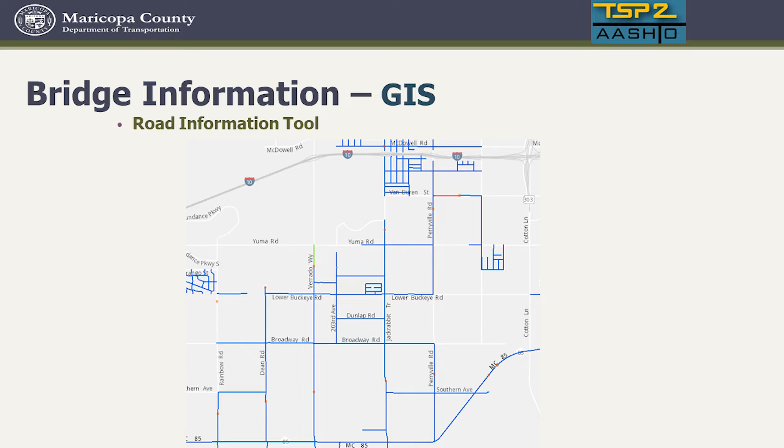This shows us our roads, which happen to be the blue roads. And then where you see the green roads and the red roads, that's where we own half the road. A city may own the other half of the road. We own the north side and they own the south side. The roads that are white are probably owned by the cities. And the gray roads are usually owned by the state. So just keeping track of who owns what and who's responsible for what is a huge effort and a challenge for us. So anytime we get a problem on a bridge or something else, first of all, we've got to figure out who owns it.

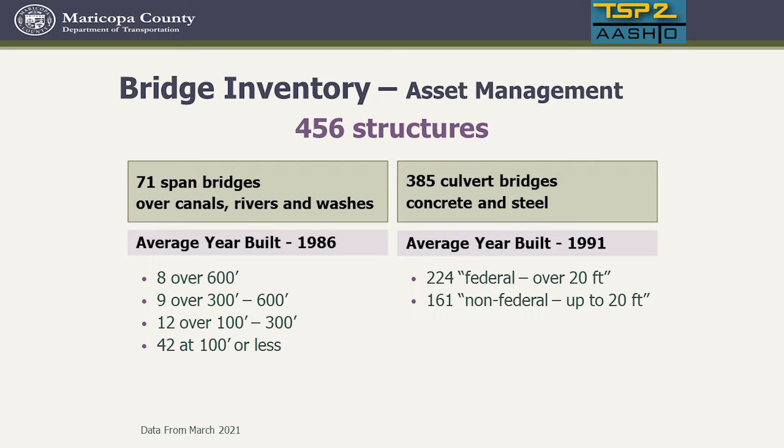In county inventory, we have 456 structures that we inspect and look at. We have 71 span bridges that are over canals, rivers, and washes. We have 17 bridges that are over 300 foot in length. And then the remainder of our span bridges are 12 plus 42, so 54 that are less than 300 foot in length. Then we have a lot of culverts. We have 224 culverts that meet the federal definition. They carry the 20-foot wheel path. And then we inspect 161 of the smaller box culvert structures.

Basically, in our county, we have a unique situation in that it very rarely ever freezes here. We just don't get snow. We may get a snowstorm once every 2 years or something. We get an inch and it's melted 30 minutes later. But overall, our bridges don't have the environment they have in other parts of the country.

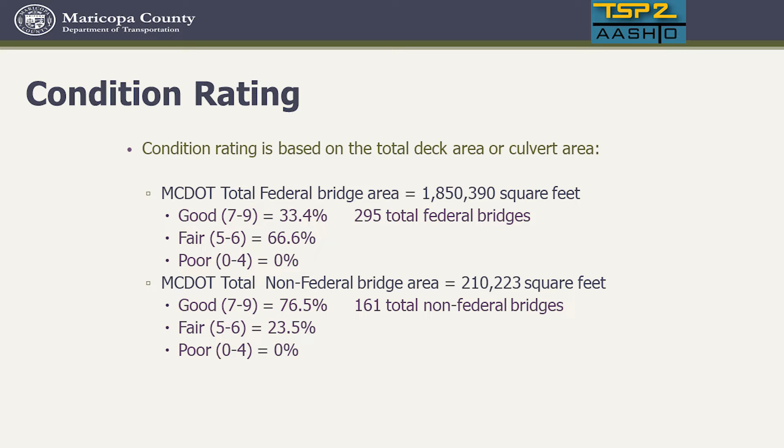But even with that said, our good condition bridges are basically 33% of our inventory, 2/3 of them are in fair condition, and we have 0% in poor condition. So we have that big group that are in fair condition. Those are the ideal candidates to do bridge preservation on. Some of the things we deal with in bridge preservation: we have a lot of bridge deck cracking over time and delamination of the bridge decks.

Leaky expansion joints are a problem. We have a lot of voided slab units, side-by-side units that were just topped with asphalt, and those become problematic. We have erosion and scour issues. When it does rain, it can really rain hard - we get quite a few inches in just a few hours sometimes. Our concrete deteriorates, especially where we have wet and dry zones. And then we have silting of culverts, and vegetation can be a problem.

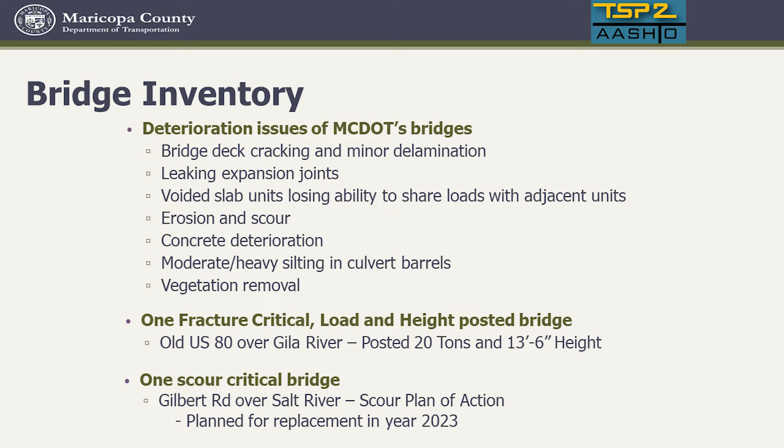We do have one fracture critical bridge, which happens to be a load posted bridge. It was built in, I think, 1928, and we'll see a little bit more on that one here in a bit. It was damaged.

And then we have one scour critical bridge, and that bridge is going to be replaced here in a couple of years, so we'll no longer have a scour critical bridge once we get that bridge replaced.

In Greater Phoenix, we have 24 cities and towns in the area, so trying to figure out who owns what and who's responsible for what can be quite a challenge.

Our average temperature in the summer, according to a Google search, was 93 degrees - that's the average between day and night. So it gets very warm here in the summer. We basically don't salt any roadways, and we have very few days of freezing temperatures.

We have a huge population boom in this county. Last year, we had about 83,000 people move into the county, and if you look back over the last 3 to 4 years, 80,000 people every year is very common for people to move into Maricopa County and call it their home.

We have a lot of bridges constructed over water canals. These water canals are used for irrigation. These canal companies usually claim that they were there before the bridges were there, so whenever we work on the bridges, they claim they always have prior rights. So not only do we have to fix the bridges, we usually have to fix the canals in order for them to let us work on our bridges.

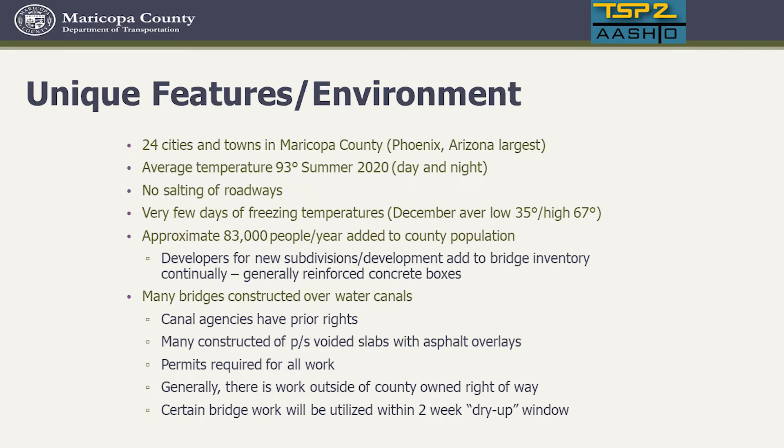Generally we only have a 2-week dry up window. Usually around Thanksgiving, these canals will dry up so they can do maintenance work on them. Anytime we have bridge work on those canals, that's when they want that work done. Also, Ryan will get into it when he does the inspection work - that's the 2 weeks he can get under the bridge to do the bridge inspection. Basically, nobody goes on vacation around Thanksgiving usually, because that's a busy time for us.

We do our own NBI bridge inspections for the most part. We have had ADOT do a few of our fracture critical or underwater inspections, and some of the canal bridges where getting permits was very, very difficult for us. Since they're doing the canal bridges for many of the other cities and some of the other counties on those canals, we let them do some of the canal bridges.

For bridge replacement, rehabilitation, maintenance, and things, we basically have a 5-year plan that we use. We enter our information into our GIS asset management system and also into the BRM system that ADOT provides a lot of the services for. Prior to 2020, we actually had some other systems that did some of our GIS work, and we've kind of gone to a new system here recently. But anyway, technology really helps us out.

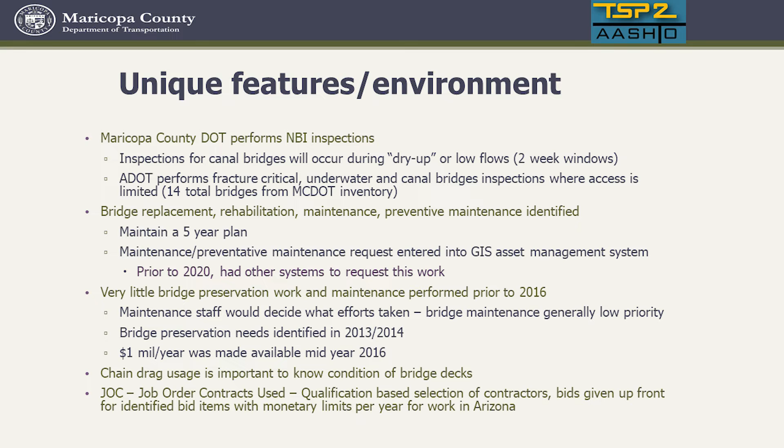We identified a lot of bridge preservation needs in 2013 and 14, and then finally in 2016 our management gave us $1 million a year to go toward bridge preservation.

We do a lot of our work with job order contracts. Arizona state law allows us to hire contractors on a qualification-based basis, so we select our job order contractors and we're able to use them generally for the next 5 years. But we negotiate each task as we go.

Cracking is one of the things I use to really sell this. This was probably the biggest problem we had in the county—these bridge decks were all cracked up. I don't know if you can see the cracking very well, but sometimes there's a lot of map cracking.

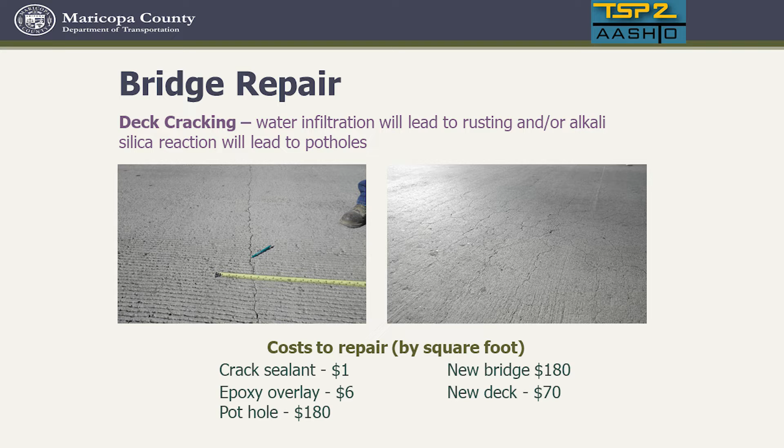If you wait till the deck's bad enough and the girders go, you might need a new bridge, which would be maybe $180 a square foot for us. If you just wait and need a new deck, that might be $70. However, I can do some sealants or epoxy treatments and it's a lot less, and I can preserve these bridge decks for many decades.

Potholes are very expensive, believe it or not. Everybody says, well, it's just a pothole. I know in New Mexico one time they showed me a bridge that was 40% pothole, and then they tell me they don't have money to fix it.

And I go, you already spent more money than it would have cost if you'd given me the money to replace your bridge deck. So don't tell me you don't have money, because you've already spent that money, and you're going to continue to spend it until you reach a point where you just have to replace that bridge deck or whatever it is.

With this, I'll turn it over to Ryan and let him tell you about some of the things he's been working on. As Jimmy said, I'm the bridge inspector for Maricopa County owned assets, and because of doing the inspections, I can go and see the issues and maintenance items that we may need to do.

So I get with Jimmy, and like he was talking about, we try to determine a 5-year plan and try to take care of our bridge maintenance.

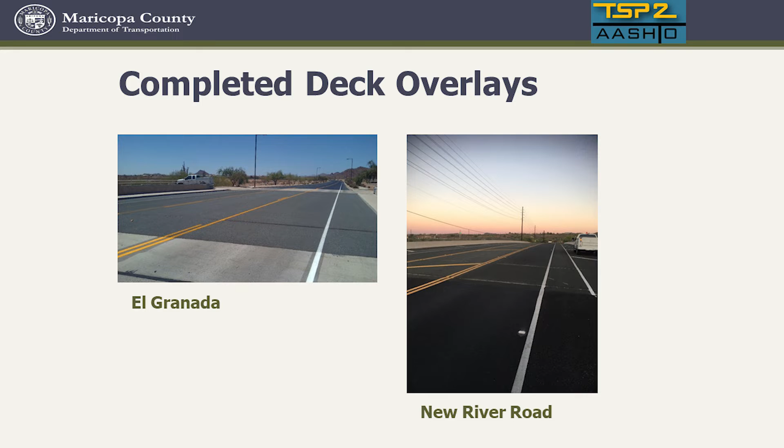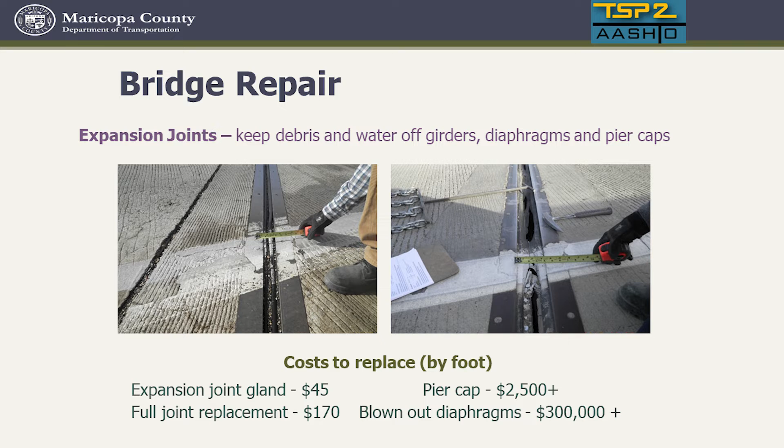A couple of joints where they've been torn or where they're not doing their job anymore. As you can see here, it's a lot cheaper to just replace a joint than to go and replace a pier cap or a diaphragm.

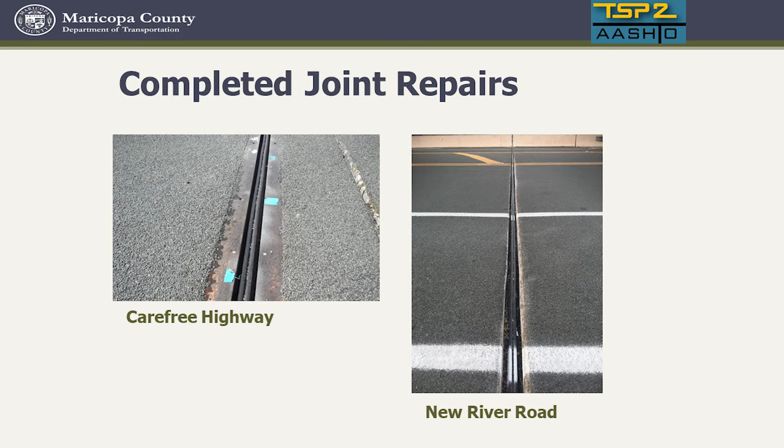This next picture right here shows a couple of the joints that we've actually replaced, and now they're nice and new and they're stopping the leaking from happening. We're able to help take care of that as well.

The maintenance work that we've done to date—so like Jimmy said, we got the funding back in 2016, and then we started coming up with our lists and items of bridges.

Usually when we do that, we kind of start with some of the worst case bridges, but we've gotten to the point where we do it area specific so that we can keep the mobilization costs down on JOC contracts, because that actually takes up quite a bit of money to have them move around the county, since we're kind of outside the major cities and stuff.

So we've got 6 more anticipated coming up this fiscal year. They're supposed to be starting those, I think, January and February coming up here.

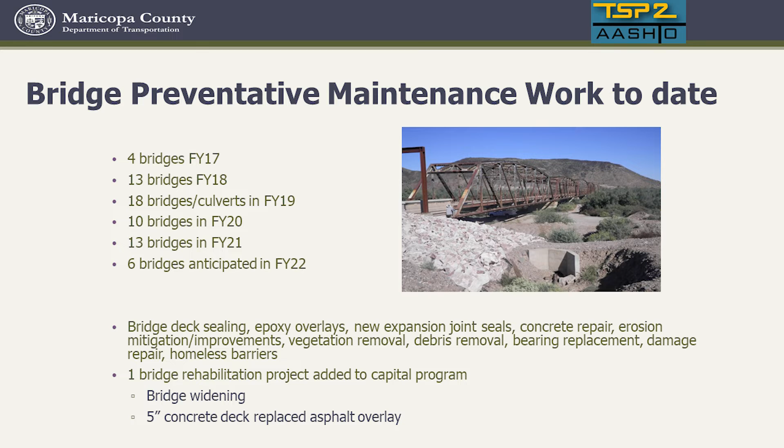In the past, the kind of maintenance we've done includes bridge deck sealings, epoxy overlays, replacing expansion joints, concrete repair—which usually consists of repairing the deck for delamination or potholes—erosion mitigation, vegetation removal, debris removal, and bearing replacement.

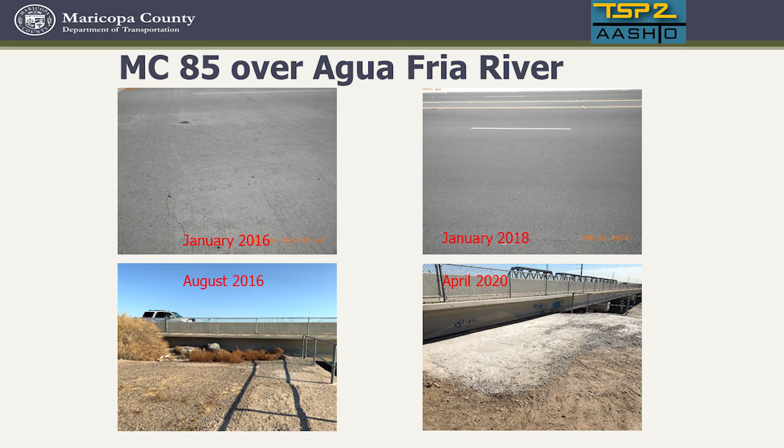This one's kind of a new one we tried this last year: we created an access gate, I guess you could call it, to keep homeless people from crawling in between two girders and making a home in there, because it actually makes a nice little home for them.

In the past, we've also done a bridge widening, I think this was a couple years ago, where we extended it a couple of units. It was a voided slab bridge, and we extended a couple of units and then added a concrete deck on top.

Here's a picture of one of the bridges. This one we did an epoxy overlay, so you can see on the top where we've got the cracking that's going along the deck, and then the new overlay on top.

On the bottom, we had some vegetation and erosion issues going on, so at each corner of this bridge we had them remove the vegetation and do a slope so the water could slope away from the bridge girders right there.

Also, in this particular one, homeless people were actually digging underneath that girder, making a home there, so that was also to help prevent the homeless from crawling underneath that girder.

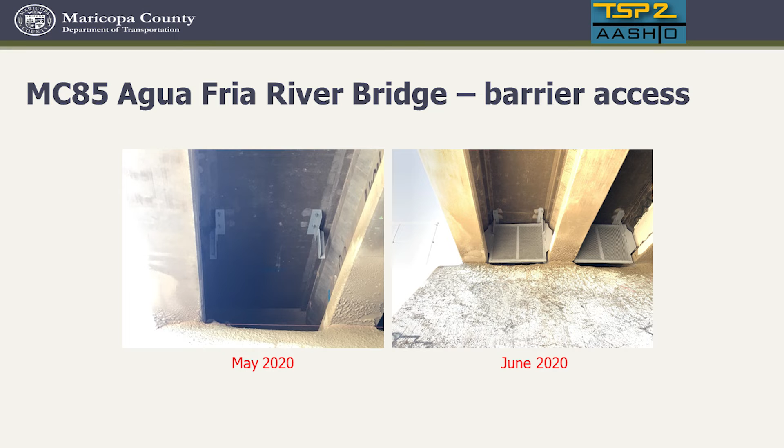This is the same bridge as the previous one. We actually had to put up these barrier access gates on the bridge, to try to prevent that, because when I'm out there doing inspections I would hate to have a surprise of someone having passed away up there. So we're trying to prevent something like that from happening. Damage to bridges as well.

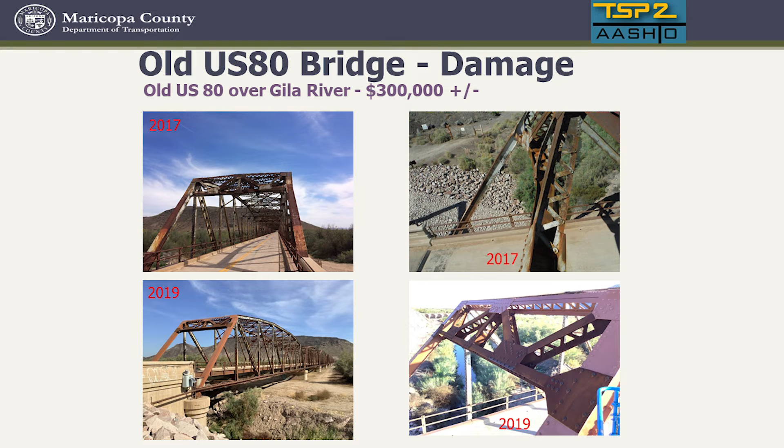This particular bridge, a Fracture Critical Bridge, is one of our older structures here in the county. I remember doing the inspection in October, and then we got a phone call, I think in February, saying, hey, what are you guys going to do about your bridge? And we're like, what are you talking about? We came out and saw that our portal trusses had been bent on this bridge because an oversized vehicle apparently drove through there.

So we got the funding together and got plans together, and we rehabbed this bridge, straightened the trusses, and put in new damaged members. They were new members, but we tried to make them look as similar as we could to the old existing truss.

On this bridge, on the top, we have the vegetation removal that we did. Me and Jimmy decided there was a potential fire hazard on this bridge, so we got a job together and had the vegetation removed. We've asked our maintenance group now to go out there once a year to keep that clear so we don't have any potential fire hazards in the future.

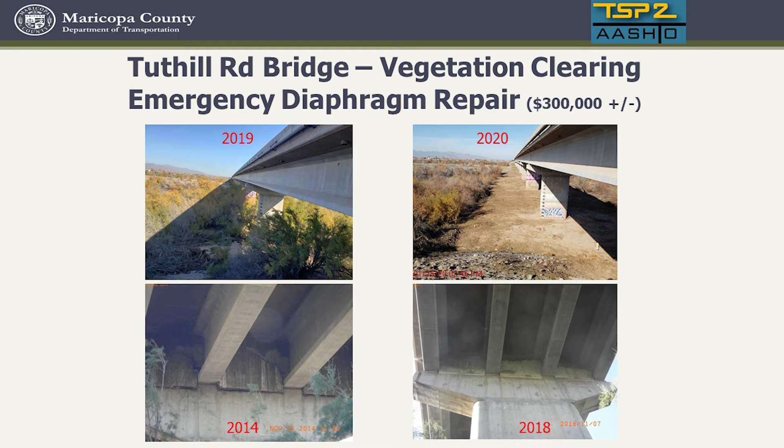On the bottom, I think this was one of the first years I was doing inspections, and I came across this mattress-sized diaphragm that looked like it was going to fall out of its spot and land on the ground. It was actually kind of an emergency repair, so we had to go through the process of coordinating so everybody could go out there and get that diaphragm repaired at that particular bridge.

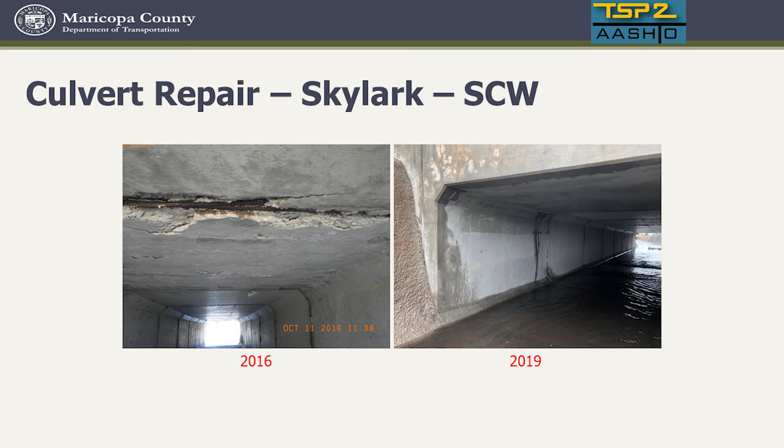We've had precast unit culverts where we've had heavy delamination occur, and so we've gotten those repaired as well.

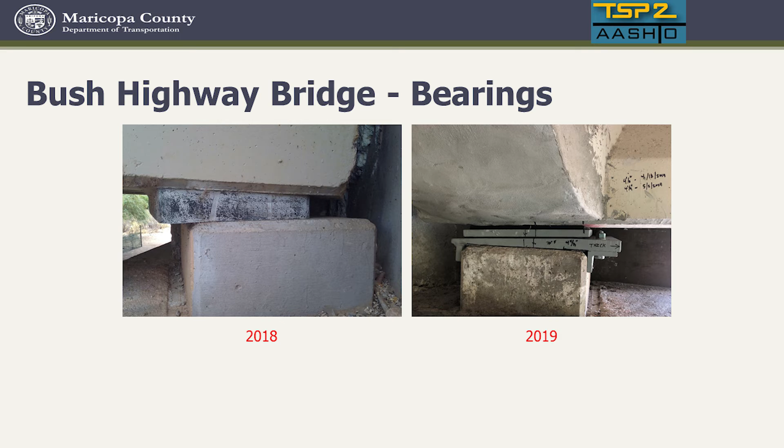On this bridge, we had walking bearing pads, and the main cause I determined when researching why these were walking is that you should never design a bridge with a tapered bearing pad. You should make the bearing itself tapered, as I did in my new design, where I had the steel plate on bottom and put the taper so we had a parallel movement with the girder at that point.

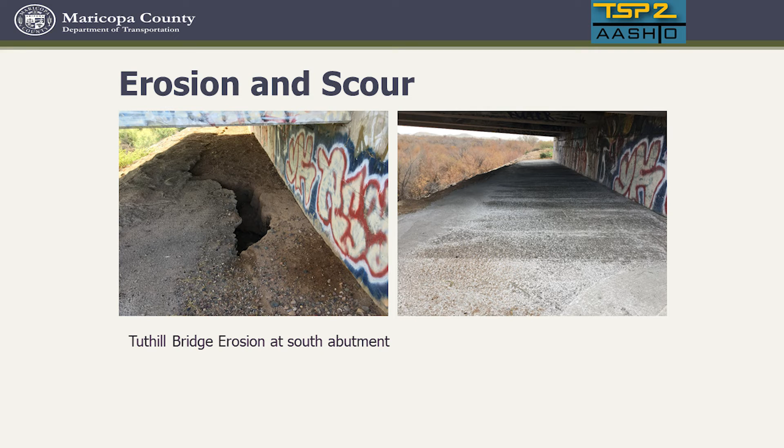On this bridge, we had a huge erosion hole occurring right at the abutment, so we filled that with some slurry fill and had them slope the top of it so the water would go down the abutment slope instead of pooling right next to the abutment.

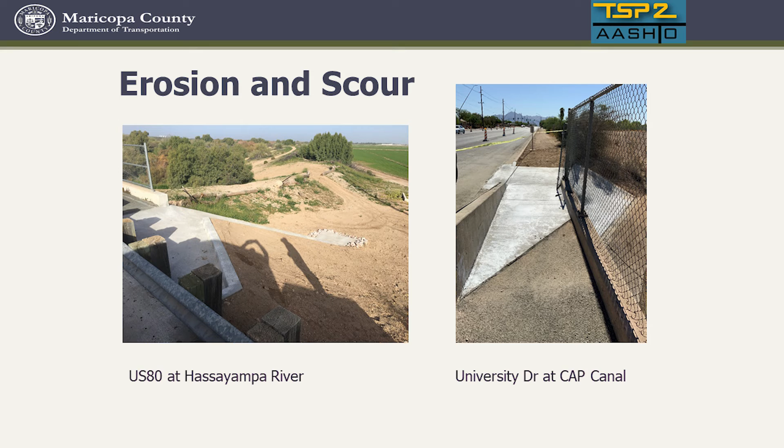Again, more erosion issues. In the picture on the left, we didn't have any spillways, so we were getting pooling and ponding in that area, so we had some spillways built. On the one on the right, it was the same thing - we were having issues with pooling and undermining, so we also created a spillway so the water could flow away from the structure.

So this bridge preservation work, you think, well, it's just a little job, but we still have to go through the whole process. We always have to get a right-of-way certification, a utility certification, an environmental certificate, all the clearances and everything that we have to do on any job, and we're always running into something. But anyway, I guess that's why they call it work, huh?

To get a bridge preservation program started, I guess I've kind of gone through this twice in my career. In New Mexico, we started a bridge preservation program probably in the mid-90s, and we got it going fairly well. I think they still have a pretty active program. And now I started one here in the county.

It's hard to get something started, but you really have to sell it that a little bit of spending early can save a lot of problems and some big expenditures at a later date. And you just have to keep talking to people. It's the old saying, if mom tells you no, well, go ask dad. Maybe he'll tell you yes, and keep shopping around.

And that's the way it is with government. Government's the very same way. Maybe one place will tell you, well, there's nothing here, nothing. Yeah, you're just looking for one yes. That's all it takes, one yes. So keep looking. Bridge decks that are continually patched are expensive.

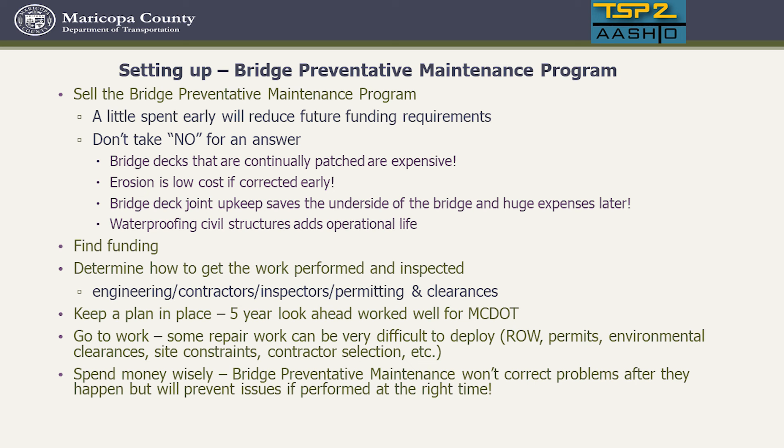Spend money wisely. It does no good to put an epoxy overlay on a bridge deck that's 30% full of potholes. Your epoxy overlay will last about two weeks. It just doesn't make any sense. You got to do the right treatment at the right time, and if you do that, you can save a lot of money. We don't even know what inventory we have.

Ryan was out driving the roads looking at things, and he found this 23-foot diameter culvert in 2016 that one day we were like, wow, we got another bridge. And that's not photoshopped. It was a 23-foot bridge. Okay, thank you.

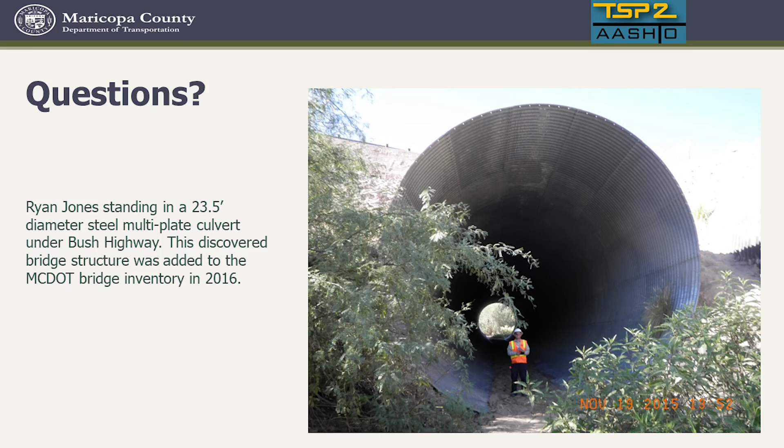I love to see that coordination between inspection and maintenance. That is an essential component to really hammer home preservation or any real functioning maintenance program.